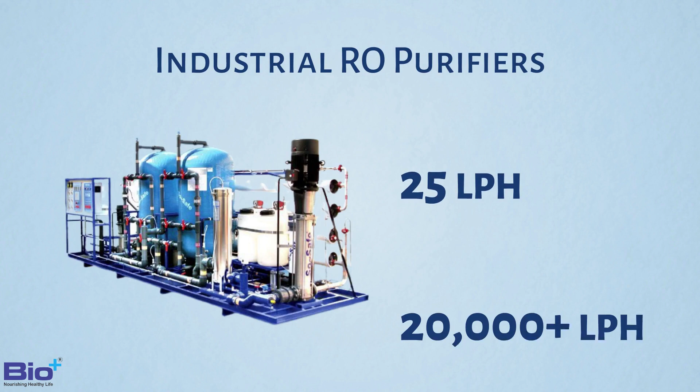Industrial RO purifiers come in various liter per hour capacities ranging from 25 to 20,000 plus LPH plants. These can be used in multiple commercial establishments, including offices, homes, factories, bottling plants, gyms, and more.

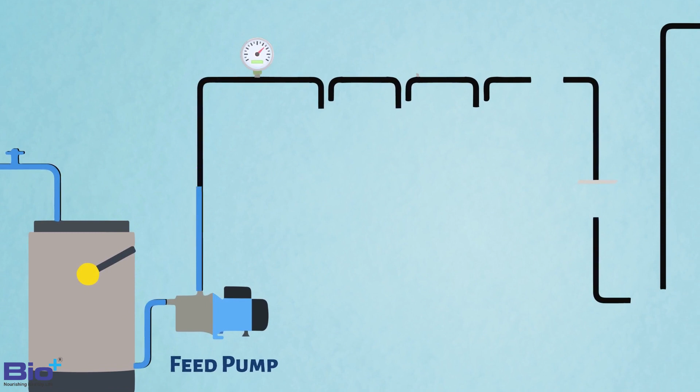Let us understand how the purifiers work. The tap water goes through the feed tank before moving to the feed pump. It then moves through the inlet pressure gauge and filters through the sand filter, carbon filter, and/or water softening filter.

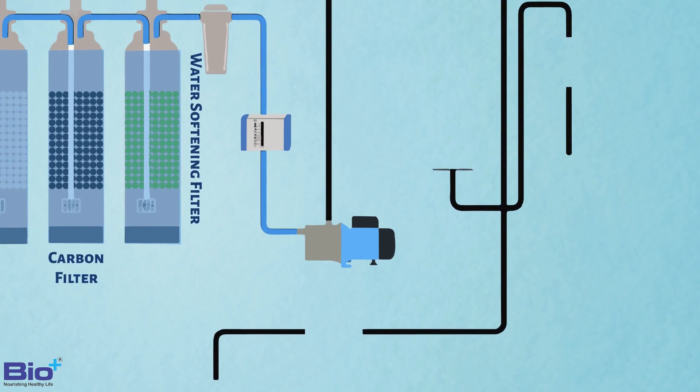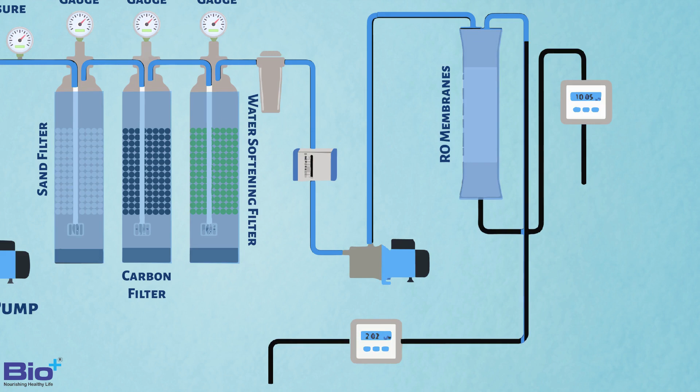Finally, it passes from the RO membranes with one rejection outlet of impure water and the other clean drinking water going into storage or a water chiller.

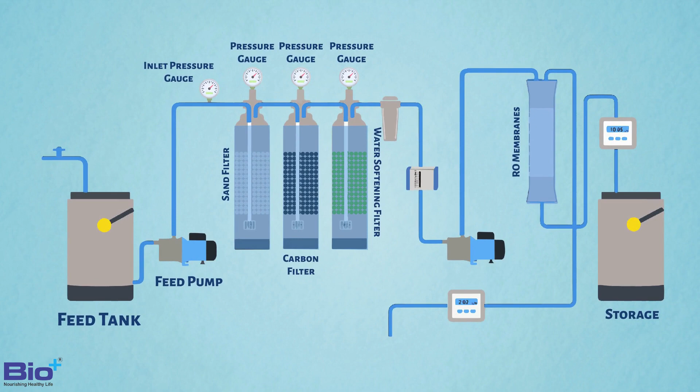It is the most effective method of water purification. It does purify the water and make it very pure, but at the same time it removes minerals, bringing down the TDS, makes the water acidic, and same as the source water, gives out oxidized water.

TDS controllers are employed for increasing TDS, which bypasses water through RO membranes. This does increase TDS, but also increases the chance of impurities in water, which is why it isn't recommended.

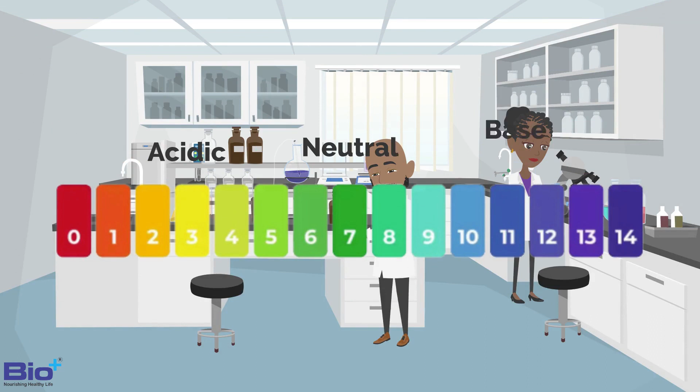For making sure you are drinking health benefiting water and for better purification, we have the BioPlus filters to present. BioPlus H2AAA filters give out the optimum pH levels, add pure minerals that increase TDS and taste of water, reduce ORP making water less oxidizing, and add molecular hydrogen.

Let us look at where and how the BioPlus filter fits in. There are three methods of installation. Installation method 1: water is fed from the industrial purifier to the BioPlus H2AAA filters for water enhancement before moving to the storage tank.

Installation method 2: water flows from the purifier to the storage tank and goes into the BioPlus filter with the help of a pressure pump before final consumption.

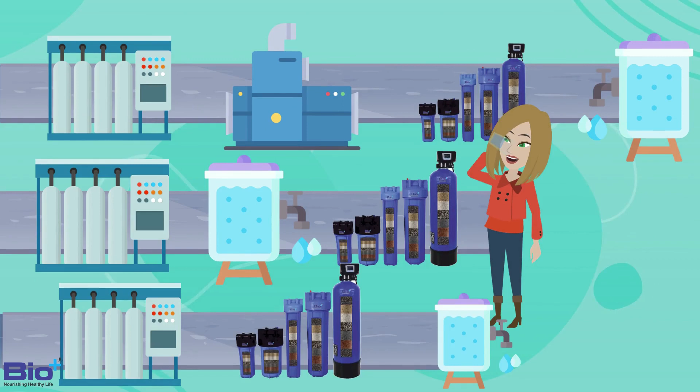Installation method 3: water passes through the water chiller after being fed by the industrial purifier, before it finally undergoes purification with BioPlus H2AAA filters and is transferred to the storage tank. The basic idea is to have BioPlus at the final stage of purification.

The BioPlus filters use NSF certified safe material and are manufactured at ISO certified safe manufacturing units. Tested by several certified labs, BioPlus filters are one of the best in the market.

BioPlus H2AAA filters come with a replacement/return policy and free pH testing of liquid. You can also choose customized options with zinc and copper filters.